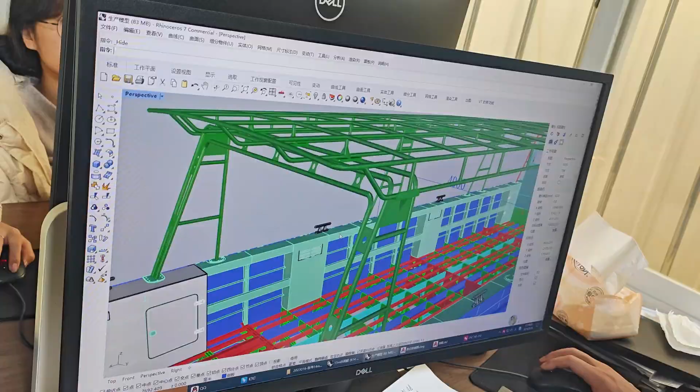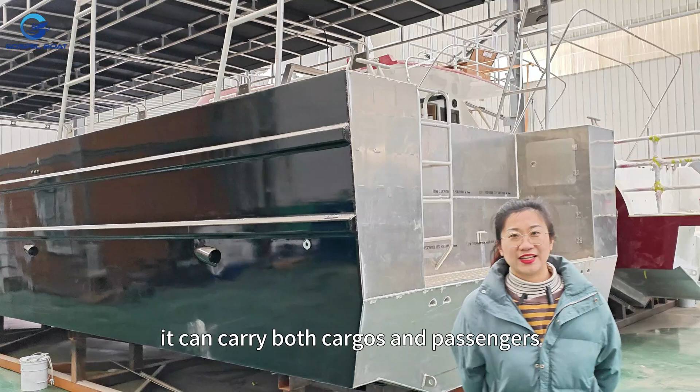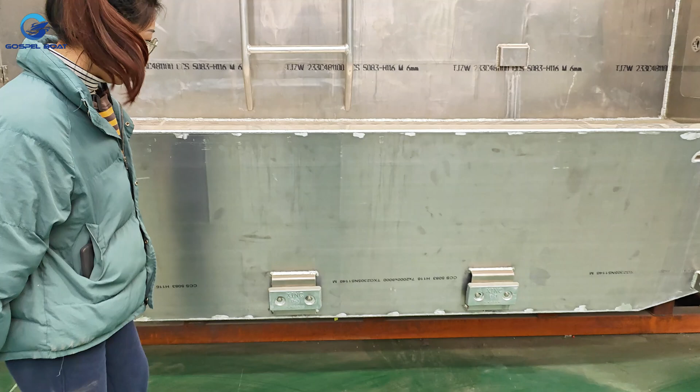Let's look at the transom area. It's designed for 4 engines, and you can install 2 engines also. The shaft length is 30 inches. Also, the transom is installed zinc for anti-corrosion.

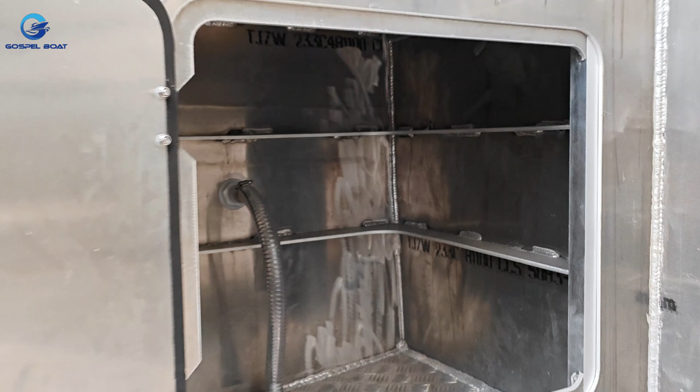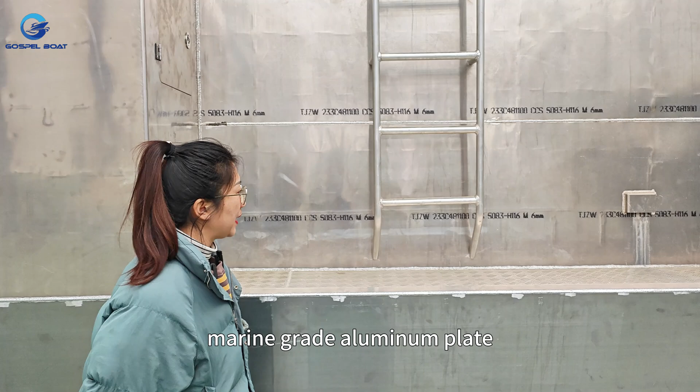There are 4 storage boxes for battery box and the life raft. Also, the materials we used are 5083 marine grade aluminum plate, 6 mm. Transom also is 6 mm, and for the bottom and for the side plate we used 5 mm.

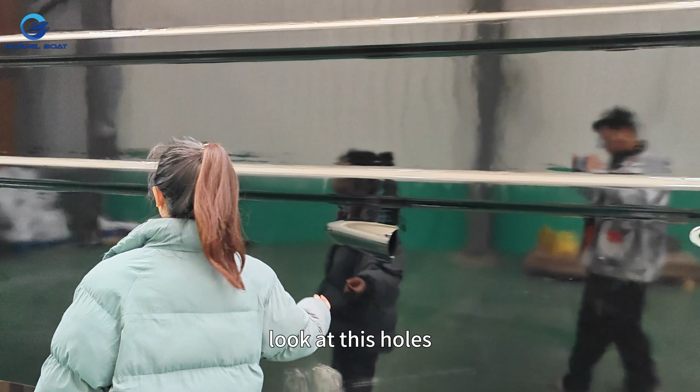Look at these holes, it's for deck self-draining water. And we have the removable hardtop roof.

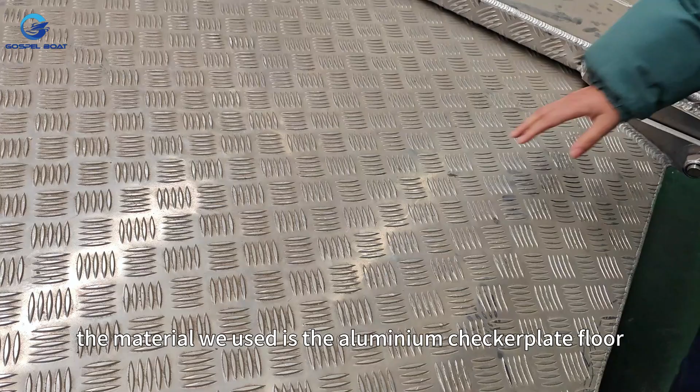Now let's look at the front door. The material we used is the aluminum checker plate floor, and for the inside we add the strength base.

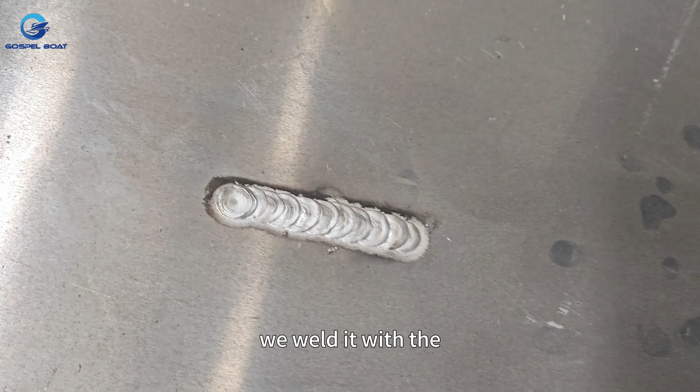These are the extension ramp. Look at this welding because the inside we welded with the strength base. And the front door is controlled by the winch, also connected with the hinges.

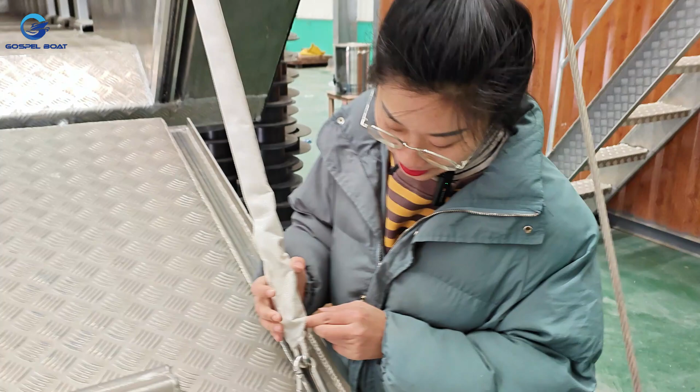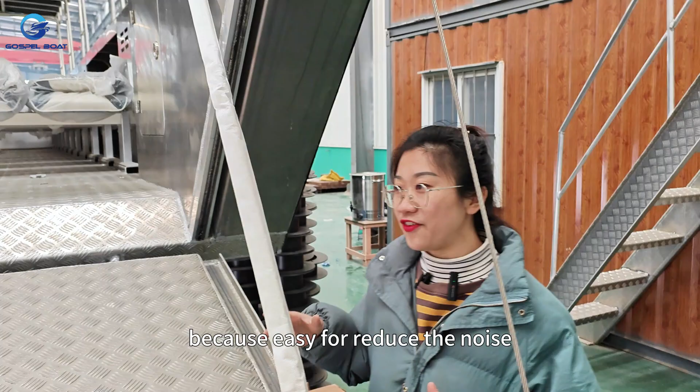Let's look at the materials. We used 3x6 stainless steel material, also covered by the cloth because it's easy for reducing the noise. And here we installed the rubber for water tightness.

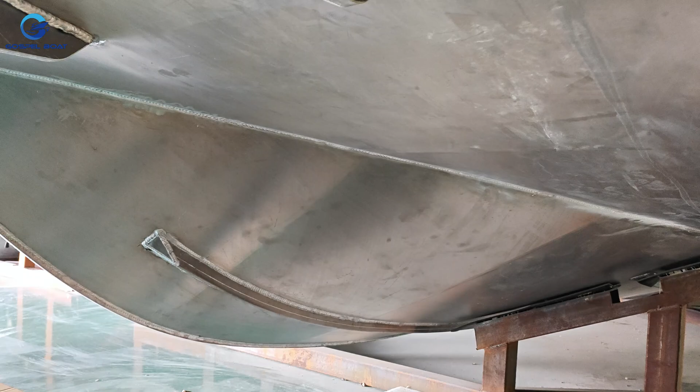Now I'm sitting on the deck of the boat. We have plenty of seats, and now I sit in one of the seats. You can see it's a very comfortable seat, with armrest and aluminum frame. So this kind of seat is quite functional. It's a small size, but makes it very comfortable. And you can have the storage here to put the life jacket.

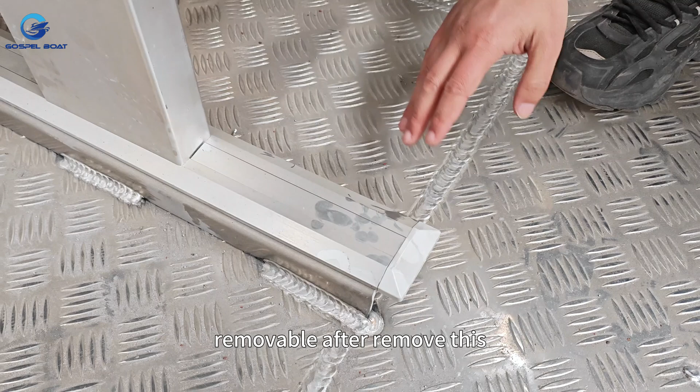The backrest can be put down and can be put up as well, for when you have some resting on the seat. Most important, we have the seat which can be removable. After remove this seat base, and it's all aluminum, so there's no rusting.

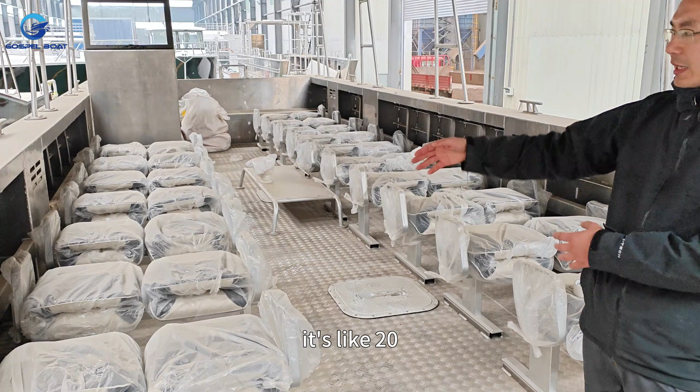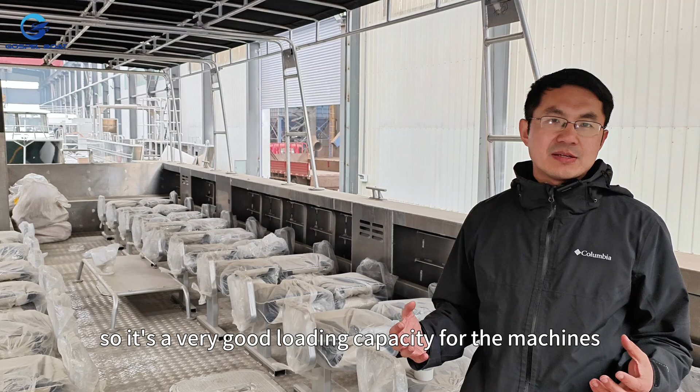Then you see we have plenty of seats, like 20 rows with 2 pieces each row. That's like 40 passengers on board. After removing all these seats, the loading capacity can be roughly 10 tons. So it's a very good loading capacity for machines, for heavy equipment, for building materials, and it's a very good working boat.

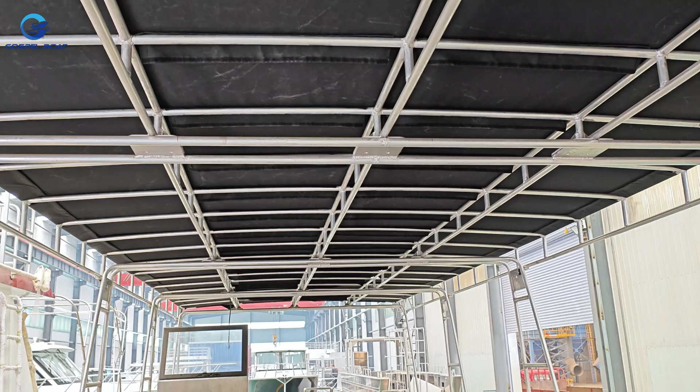And then you can see we have a long range roof with fabric on top, which makes it weatherproof. You can also put the curtain on each side to make it totally 100% weatherproof.

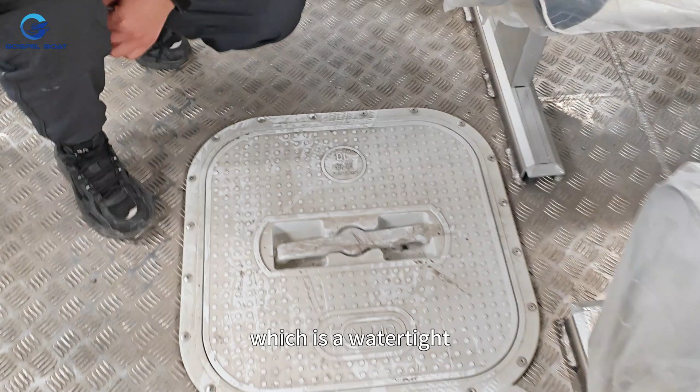We also have this aluminum hatch, which is watertight, and we do all the pressure testing around, so there's no leakage. This can be opened from this handle and has a lot of storage space inside. This is also very strong, that's why we put it here also for loading cargoes.

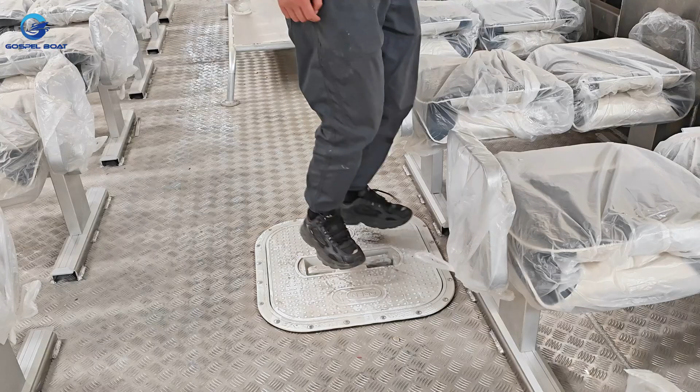You can see when I stand, it's very strong, so there's no pressure on this hatch.

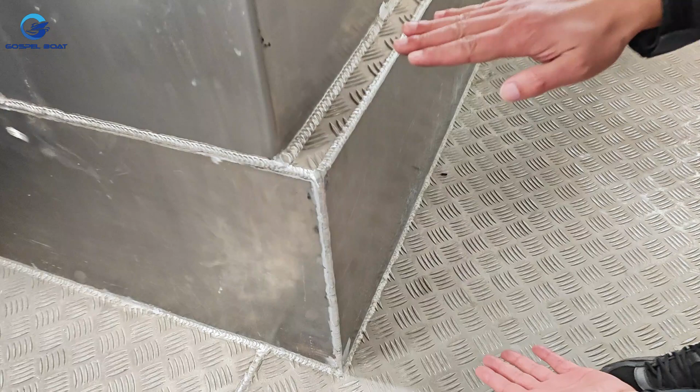Then you can see we have this console, which is a nice console, and we put aluminum on the bottom, so it makes a better reading for the captain.

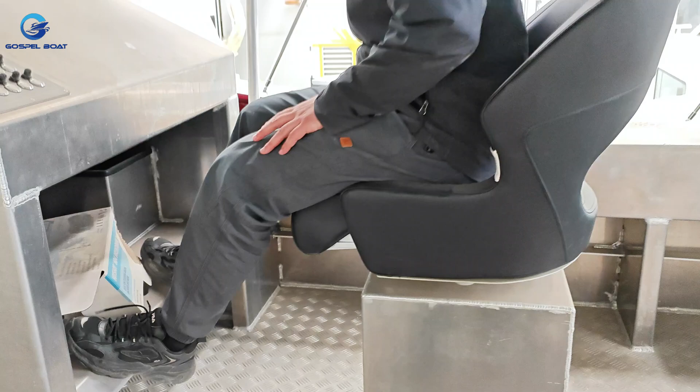So I can step on here, sit here. If you look from the front, it's a very good reading. You can always see what's happening on the front, and when you're driving, it's a very good view as well.

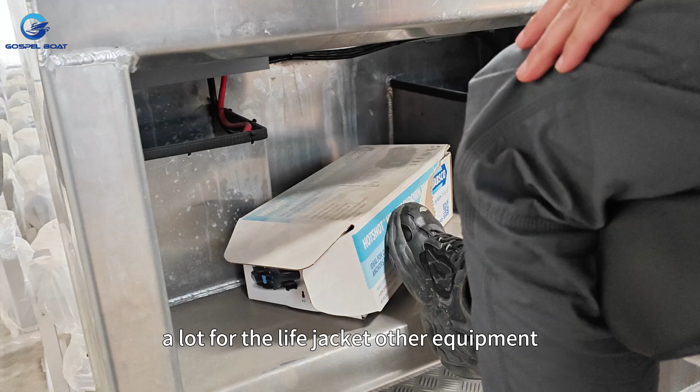And here we put a lot of storage space for the life jacket and other equipment. We have all the switch panels, all the gauges here on this dash.

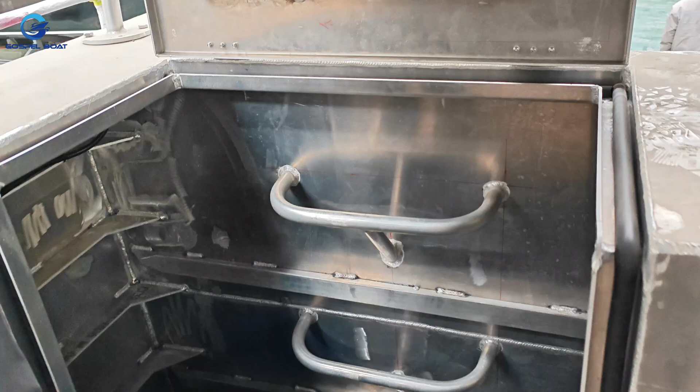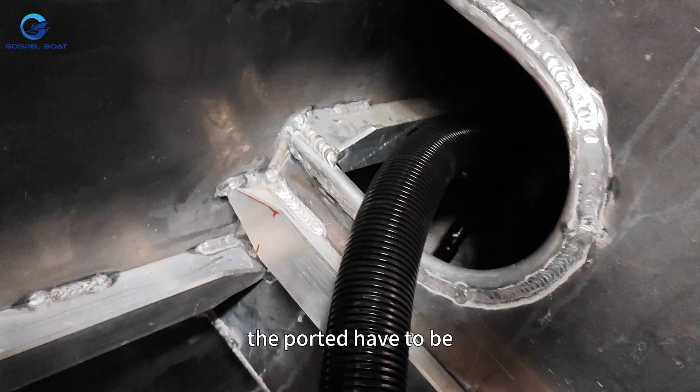And then on the back, we have this, which can be designed for opening with a quick latch, so you can go to the back for inspections. Also, the engine bolts have to be installed from the back.

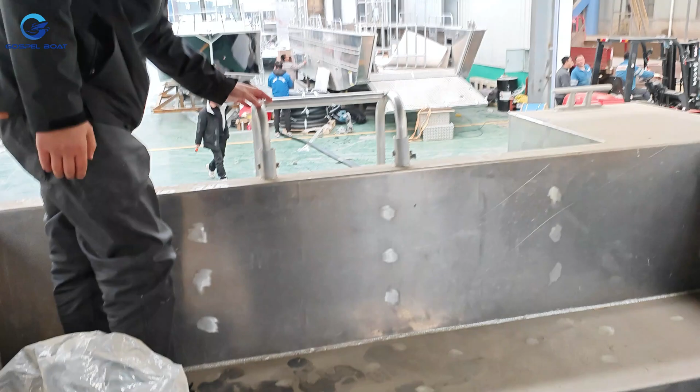So the reason why we make this is when you step here and look at the back on the chassis, there's no inspection hatches on the back. This makes sure that when you have water flow on the rear deck, there's no leakage into the boat hull. This is very good, very functional.

And on the side, we have storage 1, 2, 3, 4. These are quite good for storage of tools or maintenance of the engines. So from this view, you can see the layout of this boat is very good. It's very suitable for the Pacific Island, for Southeast Asia, and for Africa.

So if you are on the market for this kind of boat, I strongly recommend this one.

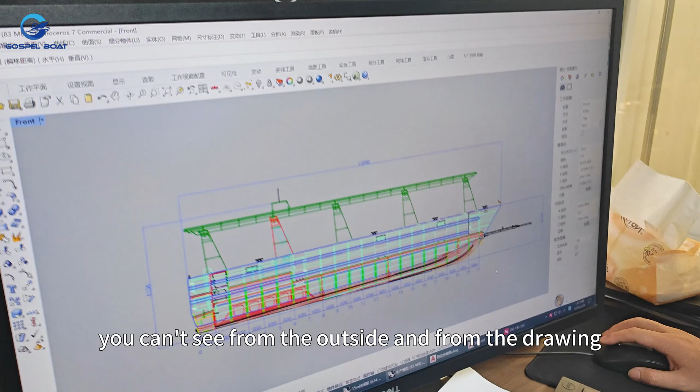My colleague just introduced you to the outside of the boat, and now we are in the designer's office, so we can show you the 3D model and show you something you can't see from the outside. From the drawing, you can see the length is 14 meters and the beam is 4 meters. The molded depth is 2.1 meters, which is around 7 feet. This will help make this boat an open sea barge.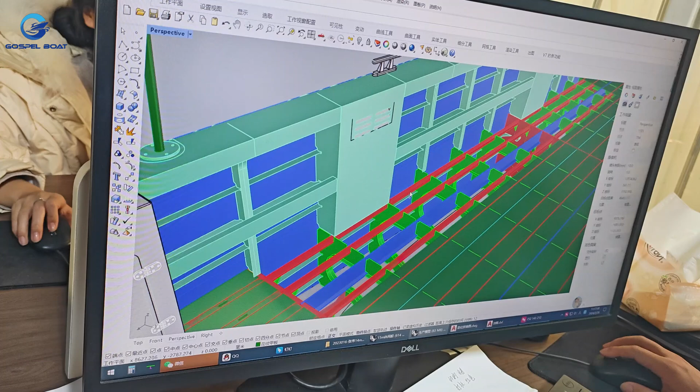And on the deck, we've got a few watertight hatches. From the hatches, we can go down the deck, and it can be used as storage and also for maintenance. So very convenient.

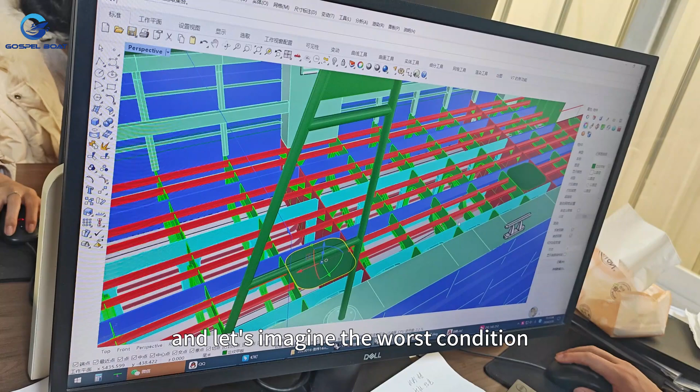And those red pieces are watertight frames. Let's imagine the worst condition: if your boat is hit by other boats or rocks, and one of the compartments gets water inside, the boat can still float on the water because there are a few watertight compartments.

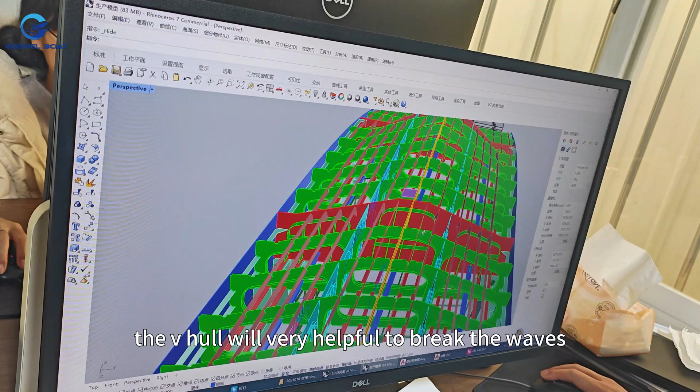And you can see the V-hull. The V-hull is very helpful to break the waves. Those red frames are all watertight.

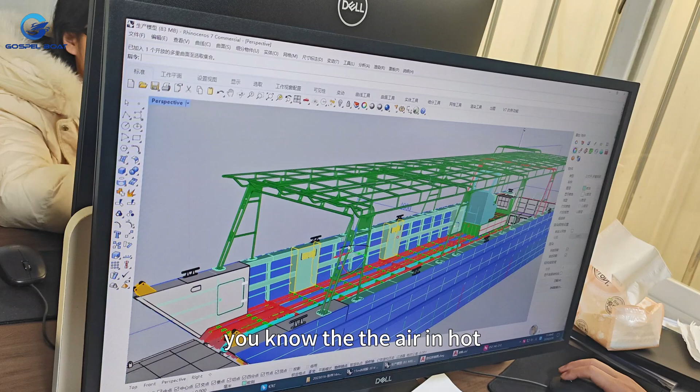And under the gunnels, there are a few ventilations for the under deck space. The air in hot weather will be inflatable, and to protect the frame and the under deck structure, the ventilation will breathe fresh air to exchange the cold air for the hot air inside.

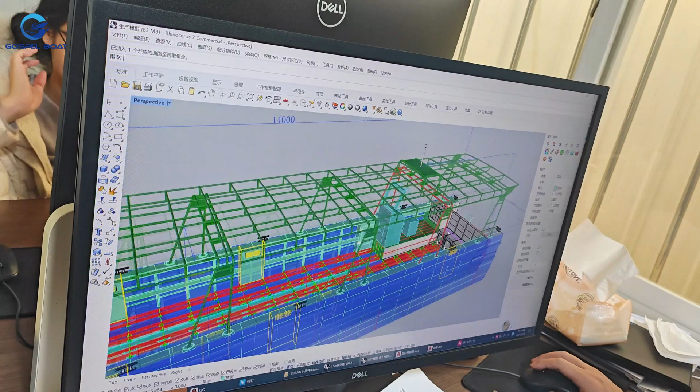Let's see the right side. Here is another hatch, so the workman, the technician, can go from here to install the motors and also do the wiring. It's very convenient.

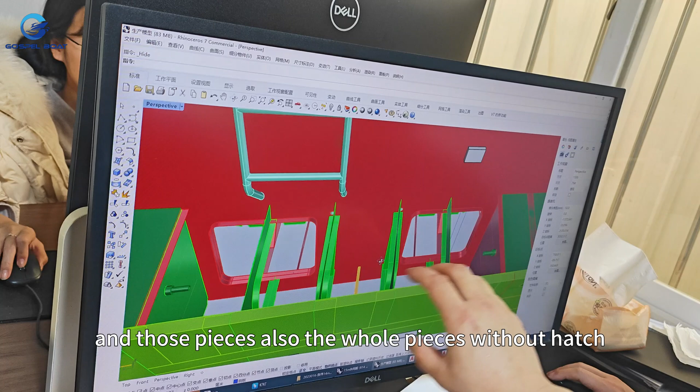And those pieces are also whole pieces without hatch, so it will stop water from coming inside the hull. This is the whole part which you cannot see from the outside, and all these features make this boat very safe and very convenient for open sea operation.